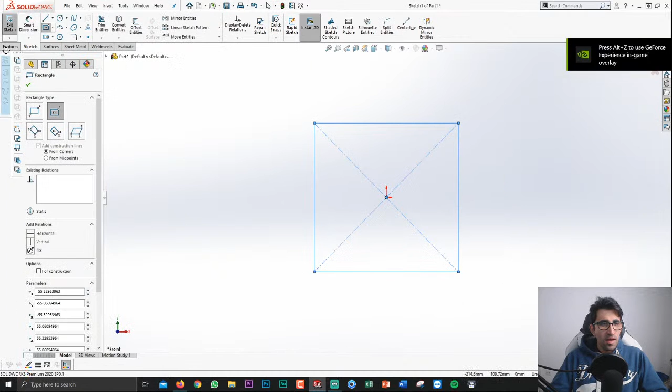Let me show you my screen so you can also see me better. So I remember very vividly one of the things I was really proud to be making the first day I started working with SolidWorks was something like a cube, and then something precisely like this. I didn't know how to create a cube in computers before, so everything I did was quite nice for me, and I was again hooked. It just became my hobby. One thing led to another. I kept working. It became my strongest asset. It got me hired with a very high paying job. It landed customers for me that I didn't know.

When I was in university, other students came to me and they even paid me to do their project, which was not legal, but now I can disclose it because that time is past. Even one of the students came to me. He said he had a client outside of the university and he's willing to pay £1,000. I studied in England, and British pounds was the currency. And for me, who was living on canned beans, every night eating Heinz beans or stuff like that, if I was lucky I could afford a pizza, £1,000 was out of this world.

But it's funny. A lot happened, and I'm really thankful to SolidWorks. The fact that I got my European German citizenship, everything. If you just trace back everything that happened in my story, one way or another, I kind of owe it to SolidWorks.

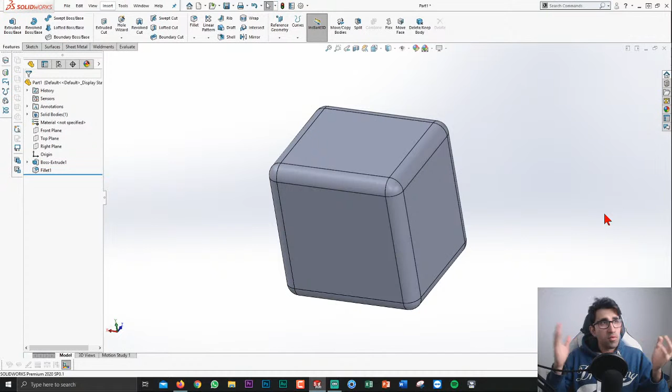Okay, good. Guys, the reason we are here today, I'm not going to teach any specific thing because my teachings are on the channel or on the webinar. Today we are only here to answer any question you have. Especially the repetitive ones, if you come across an issue, if you come across an error that frustrates you and you don't even know how to describe it or who to ask, this is why we are here today. And I hope people who are joining us now can hear me loud and clear. Just describe any situation. I'm going to go over each and every one of these questions and answer them to the fullest. So let me know what you think.

Avito, do you have any questions? I just mind my own business here and wait for you guys to...

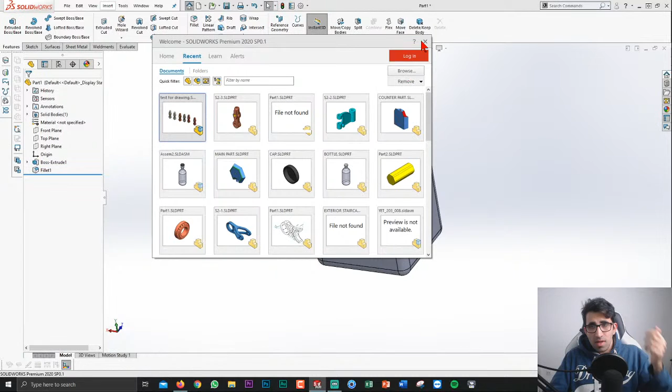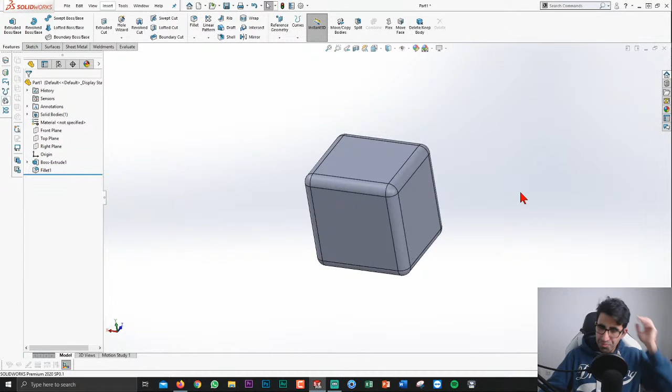Tanvir is asking me if I'm an expert on SolidWorks. Well, I have to clarify that because expert is a term that has a meaning when it comes to SolidWorks. There are levels in SolidWorks and expert is one of the levels. So let me tell you exactly how it is. As a matter of fact, I believe I have a picture of it somewhere, but I have to look for it. So just give me a second while I describe what exactly an expert is.

When it comes to SolidWorks, when you start, you're a beginner. Okay, the majority of people are beginners, newbies. They don't know how SolidWorks is and how it works. The next levels are intermediates who kind of know the software, they know the interface, and so on. And after that, we go to CSWA. CSWA stands for Certified SolidWorks Associate. Okay, this is the lowest certified rank SolidWorks offers.

After that, you go to Professional, CSWP, which is where I am, Certified SolidWorks Professional. I was in this level back in 2011 and recently I got it again. It doesn't mean you're not above this, but this is my minimum, CSWP. Once you get your certification in CSWP and 3 more certificates out of the 5 available, you are qualified to take on the CSWE exam, which stands for Certified SolidWorks Expert.

So if you're referring to that expert, I don't know. I haven't taken the time and effort to take on the exam. I might pass it, I might fail it, but I have never done that because it was never required for me. It was never necessary. CSWP did me just fine, and I basically achieved whatever I wanted to achieve, get the job, and do basically no challenges. So I never went after CSWE. I don't know if this is what you're asking. If you're asking expert in the everyday use of the word, you could call me a SolidWorks expert. Yes.

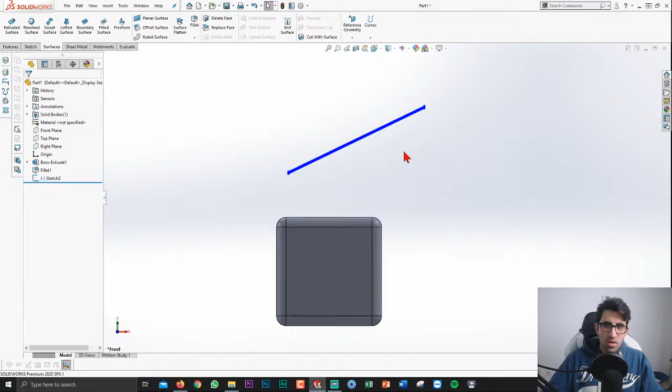I was talking about the line format, which is here. You can right click, go to toolbar, activate line format here. It was activated, I just deactivated it for you. And when you do that, it will be added somewhere. In my case, it's down here. And when you select your line, you can change its type. Go back to normal line. You can change its thickness. You can change its color, whatever you want. It doesn't change the nature of your line. It just changes the format.

Now, since I haven't gotten any technical question except for the surfacing techniques, I am going to scratch the surface on the surfacing technique. Do you see what I did there? So surfacing technique is very, very similar to features. If you compare the tools that you see here, they're pretty much the same, except the results you get from the tools in the surfaces tab come with zero thickness. So you have extruded surface, you have extruded boss, you have revolved, swept, lofted, boundary. So you have the equivalent of almost everything you get on the features tab. And in a second, I'm gonna go in and use some of them.

Although, due to the nature of surfaces, which come with zero thickness, some of the tools you get on the surface tab cannot and do not come in the features tab. You do not have any extrude cut. If you want to cut a surface, you're gonna have to trim it. Let me show you. First of all, I'm gonna start with a line because I cannot think of anything else right now. And once I do that, I can easily extrude this.

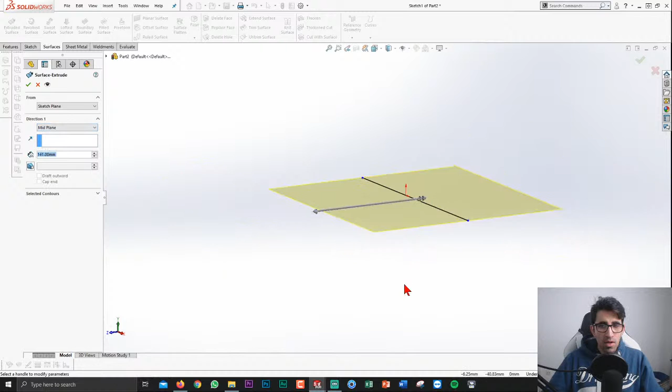There is no need for a thin extrusion because surfaces don't have thicknesses. Therefore, everything is thin anyway, and by thin, I mean zero thickness. So you can see the extrusion Direction 1 looks pretty much like the submenu on the extrusion in the features tab. And you can make a surface.

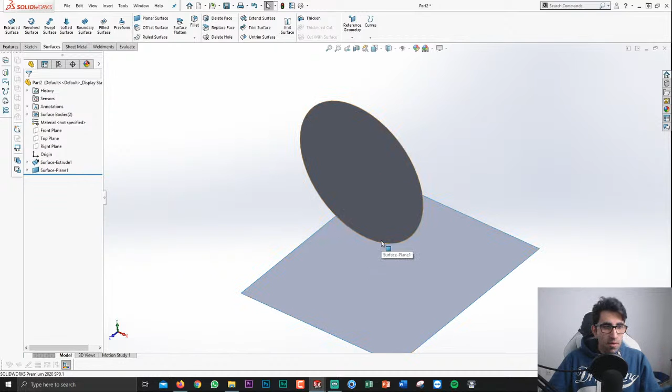Another way to make a surface is to use a planar surface. So if I draw a circle here and want to turn it into a surface, I would just use planar surface and this will become a surface, something like this. All right. Now, there are ways to convert a solid body, which is what you make when you're using the tools in the features tab, to a surface, and the other way around.

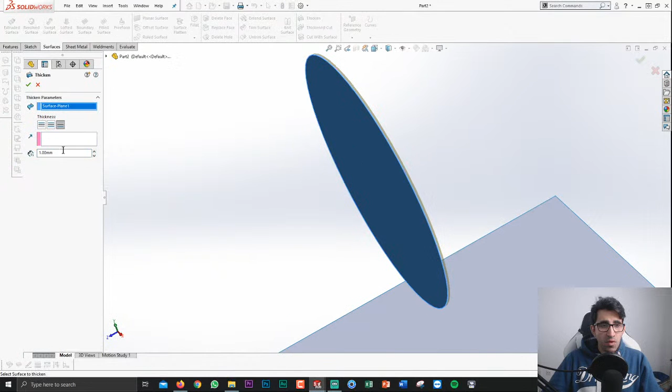There are tools on the first surface tab that allow you to convert your surface with zero thickness into a solid body with thickness, and that is called thicken, which is pretty intuitive. When you select the surface, you can define a thickness that you want to add. Let's just say 10, the direction on which side, or both.

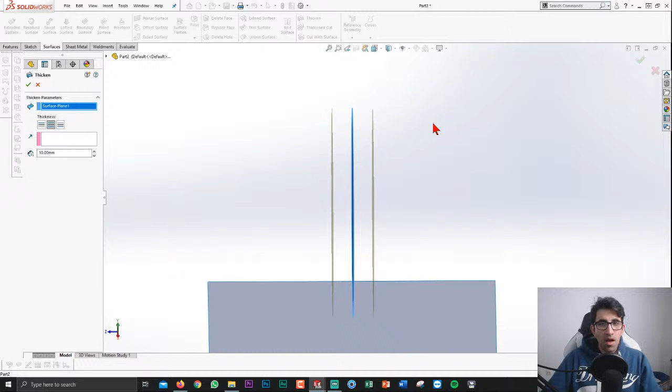But in case of both, it's a little bit different than the direction 1 in extrusion, because when I click on the middle button, it is thickening my surface 10 to the right and 10 to the left. So altogether, thickening it twice this value, 20. All right, don't forget this and don't make this mistake.

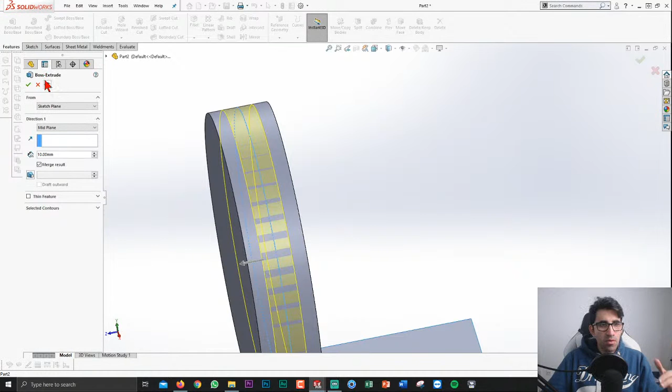Unlike this, if I go back and reuse this sketch and go to features, make an extrusion, set it to mid plane. If I put 10, you get 5, 5. You see that? This is the actual 10. So there are minor differences between the menus in the feature tab and the surface tab, and you have to get acquainted to that over time when you work with it. You just pick it up very fast. It's not that complicated.

So Deracuda says, I'm not finished with the surface, guys, I'm just reading the questions in between because this topic goes on for hours. He says he struggles with understanding how to fix errors when trying to define a sketch. Any chance you can purposely cause a basic error and then a complicated error and show how to identify and fix issues.

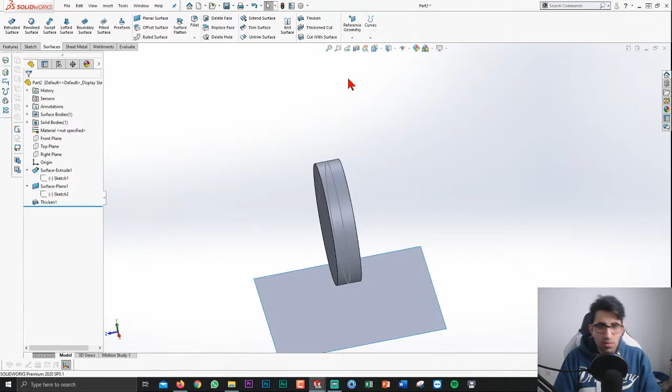Tanvir, I will get back to the surfaces, but this is a very good question and it's a short one, so I'm gonna do this and go back to surfaces. I hope that you're okay. Give me a thumbs up. Good. Deracuda, pay attention. This is a very, very common mistake.

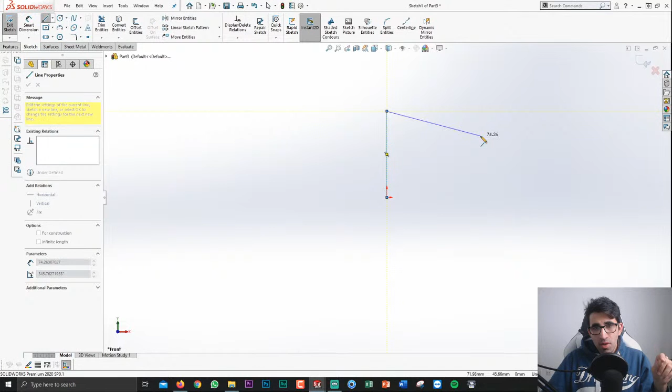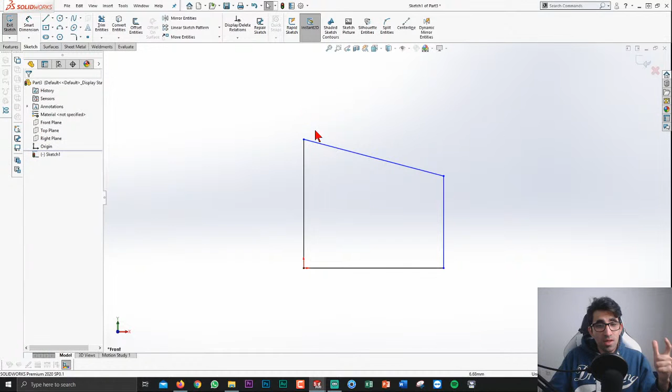So let me show you briefly what's happening so you understand what's going on. When you draw a sketch in SolidWorks, it can have one of 3 states. It can be an underdefined state, which is what you see here; look at my mouse cursor, it says my sketch is underdefined. It can be fully defined, where the sketch turns fully black. You see 2 of my entities are in black, 2 of them are in blue. So these 2 are underdefined, these 2 are fully defined. These are also not fully defined.

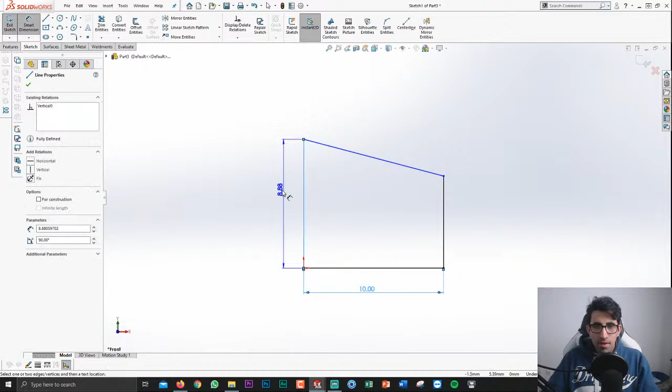And there is the last stage, overdefined. This is where you struggle, Deracuda. Let's make something that doesn't make any sense. So this value is 10. This value is also 10. And let's assign an angle here. I'm trying to purposely cause a mistake. Let's say 70 degrees. Right, everything is fully defined and you can see it here in black.

Now, what doesn't make sense? I assume most of you are engineers. Can we have this sketch over here and at the same time have this entity and this entity equal to each other? No. Why? Because in that case, we should be looking at a square. Therefore, this 70 degrees cannot exist. So if I click on equal, I just created a problem. No solution found, and this is exactly the state of an overdefined sketch.

So how do you solve it? When you're going to solve this, you have to click on the red entities, and immediately you see the existing relations assigned either automatically or manually to that entity. So I can see this line is vertical. It has an angle assigned to it, which is the 70, and equal length. These are yellow or mustardish, and this one is red. This means the red one is the issue and the two mustard ones are caused by it.

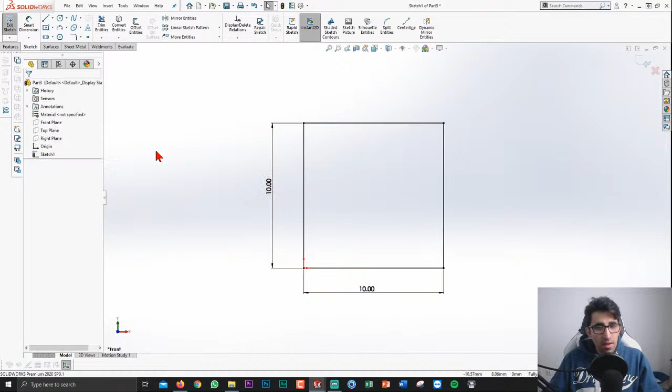Now you might be able to solve the problem by deleting one of the mustard ones. Now you see that it's still fully defined, but you don't have that 70 anymore. It's back to being a square, as I said. Control-Z that, click on that, delete equal length, and everything is back to normal. And it's not changing to a square because I just deleted the red one.

I hope it was clear for you there, Deracuda. Let me know.

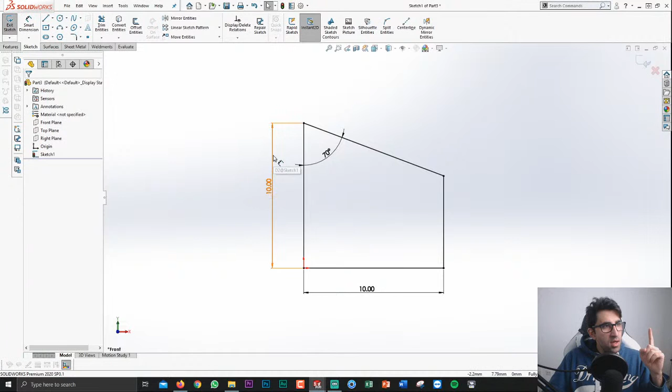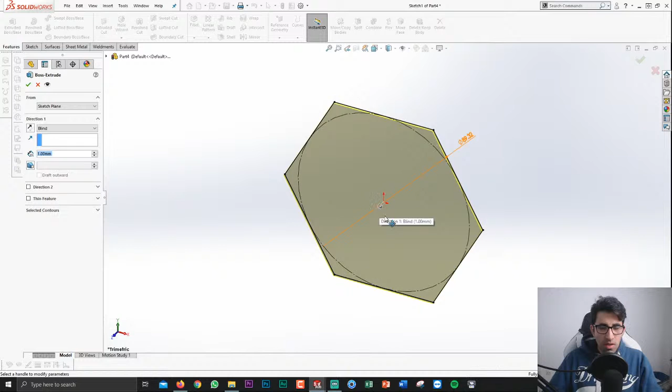Now, there is another issue, guys. Pay attention. It's in continuation of making errors in your sketch. A lot of times it happens when you are modeling. You draw a base sketch. I don't have time to fully define it, so I'll just do it automatically. And then you extrude it. I just need to have some edges and some points, right?

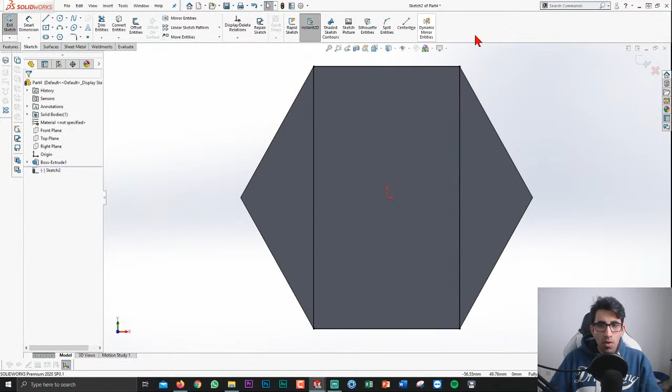And I'm gonna draw something here on top of this surface. Let's just say a rectangle. I'm gonna start from this point, okay? Emphasize on this point. And I'm gonna end on this one, right? Now we have a fully defined square. Now I'm gonna go ahead and extrude it a little bit further. Let's just say this is the component that I wanted to create.

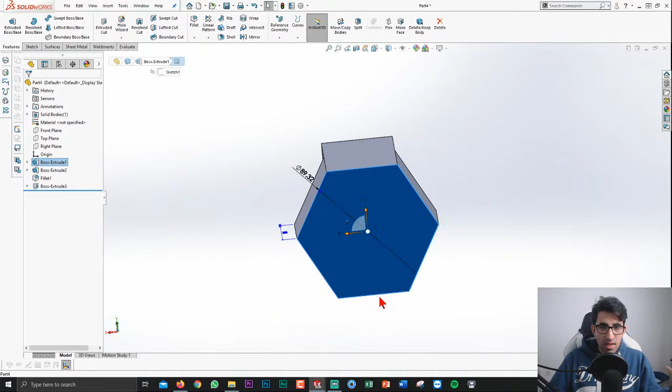Now I continue this, I add features on top. I don't know, fillet here. Let's just say, can we just create another hole there? That's also fine. Where is it? Go in, make a hole. All right. Now at this point I realize, oh, that initial cross section shouldn't have been a hexagon. It should have been a circle or pentagon, doesn't matter.

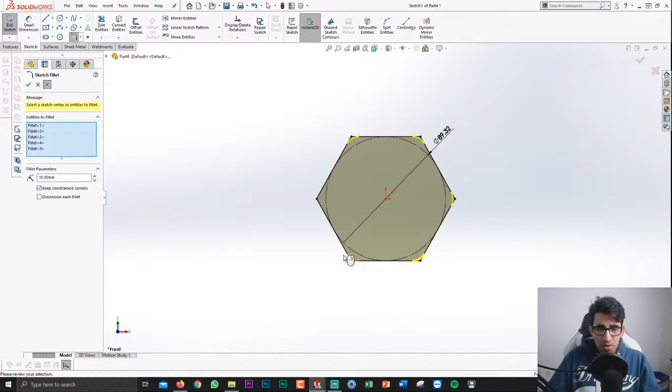So I go back, and without paying attention to all these dependent features that I built on top of my parent feature, which is the hexagon, I delete this, or you know what, better, I'm not gonna delete it. I'm just gonna round the edges. I just realized I forgot to round the edges. So casually, I round all the edges. I hope this works. All right, exactly worked.

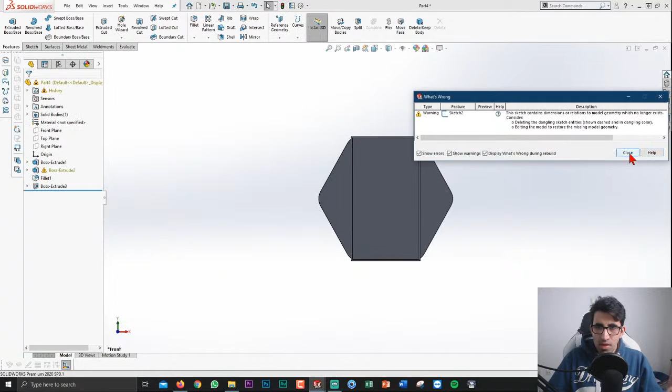Now, what happened? I get an error and everything is suppressed in the design tree and I just don't know what happened. When this menu pops up, don't worry. Either click on don't show again and click on continue, ignore error, because only then we can see what's going on. All right. Immediately I see where the error is, because this one is yellow. Now, I don't know if it's on the feature level or on the base sketch level.

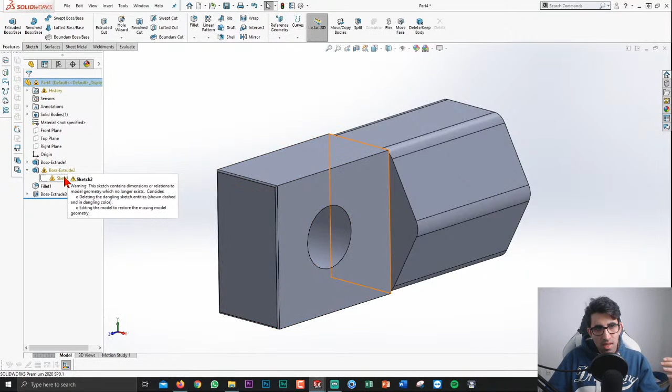So I open the Boss-Extrude, I see the sketch is in yellow. So I know I should go down and investigate the sketch. Feature is not the cause, it's caused by the sketch. So one click on that, click edit sketch, make it normal to your screen, and look for any mustardy entities. And you know entities are points, edges, and so on. So immediately I see this one in mustard and this one.

Why? Because this point was supposed to be coincident to that edge of the hexagon, which does not exist anymore. So it is trying to connect itself to an edge or to a point that doesn't exist anymore, and therefore you get the error message. Now, your ways are, you can delete the sketch relation first of all. It does get rid of the issue if I rebuild it, but it will leave your drawing in the underdefined state. So if you want to fix it and don't mess anything up, try other ways to fully define your sketch. In this case, I'm going to go with dimensions.

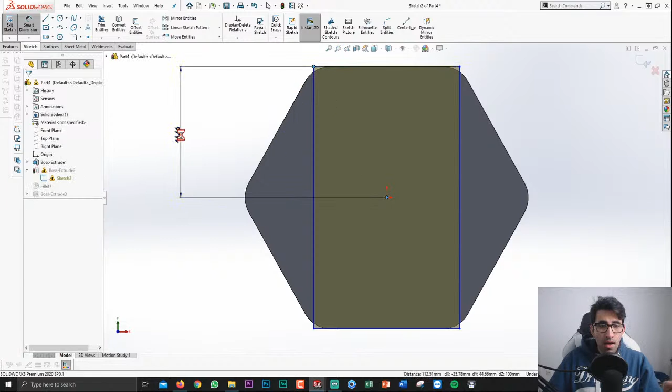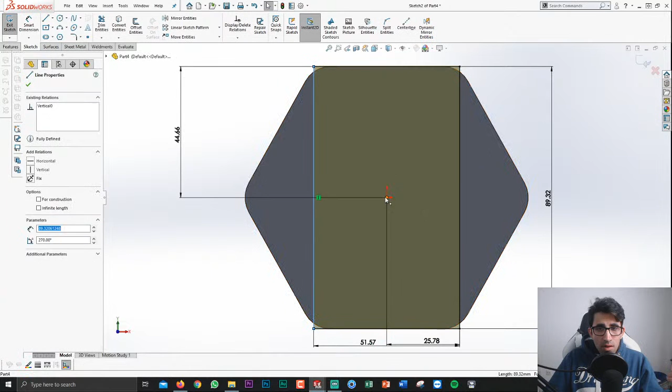I'm not going to change any dimension, but let's just say assign some dimensions to it. And until it's fully defined, there is the height missing, and boom. Now it's fully defined and I can rebuild it and the error message should be gone. It's still not gone. Interesting. So let me go back. Anything else? This one? No, that doesn't make any sense.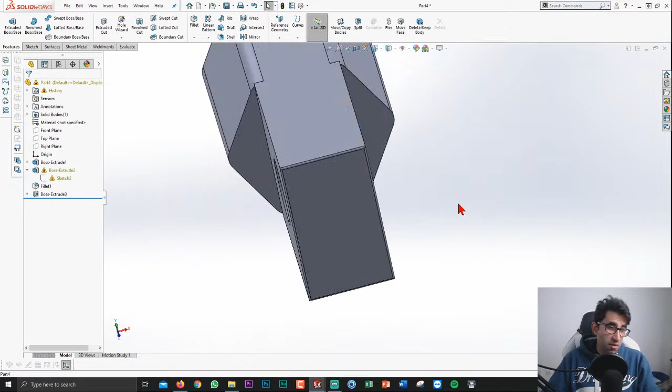So in this case, what would I do? Because this is the first time it's happening to me. It's not the first time. In this example, it's the first time. So I'm not prepared. Let's see what I do, because this is my real reaction. If I face a situation like this, I try to, let's just do something else. I'll draw another one.

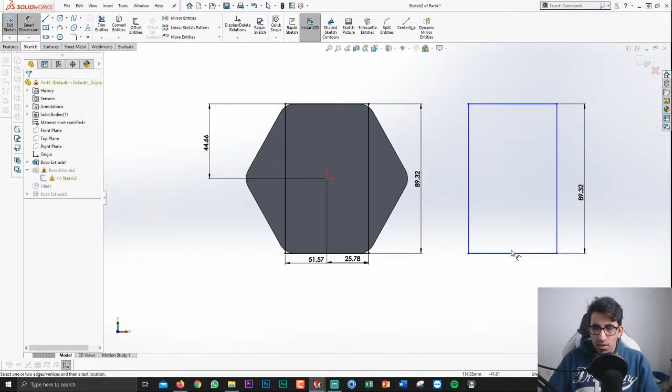This one should be this much, right? And this is how much? 51, 57. 51, 57. Get rid of this completely. That's what I'm gonna do. Place this one midpoint on the center. This should do the trick. Coincident and rebuild.

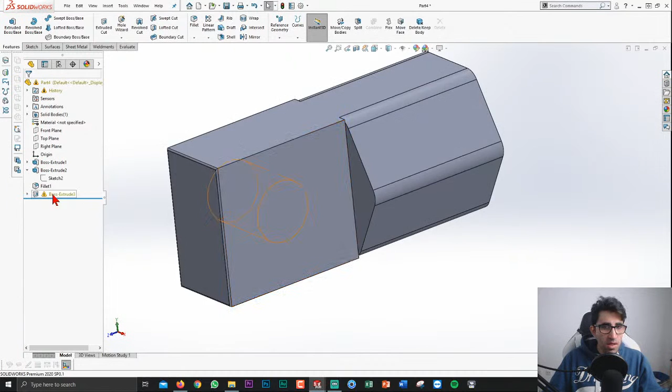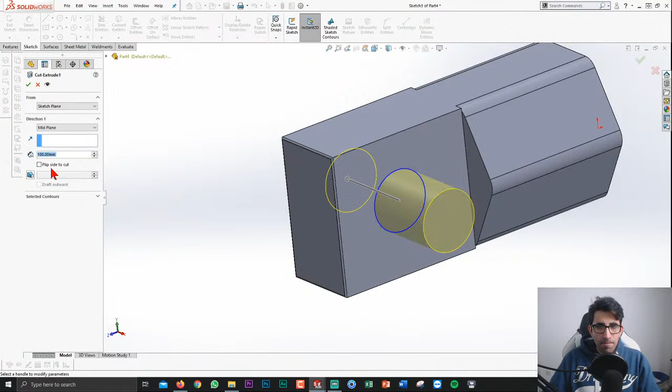There is still another error. Oh, good. At least now I push the error to the next level, and this time this one is missing. We didn't fully define it. So let's get off this 1, 2. Use this. Extrude cut. Done. I see where it's going. Through all both. Done. Still. That's something, man. All right.

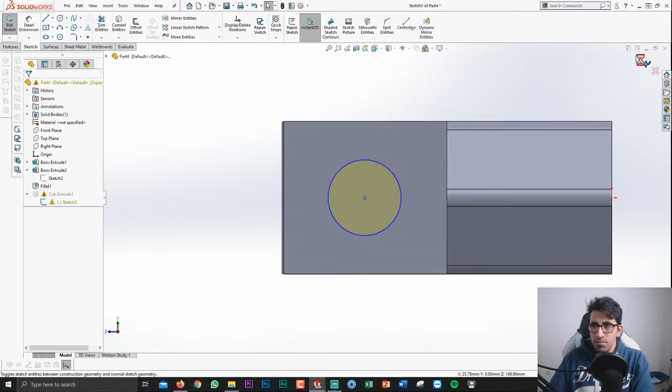Whoa, that goes into the pro level. I think I know what's going on. Yep. All right. So guys, before I show you how to fix this, let's just do a recap quickly, because it has taken longer than usual. Sometimes it happens for me too.

What did I do? I started drawing a hexagon and I built a cube on top of that, and I placed the corners of the cube on the corners of the hexagon. I went back, rounded the edges of the hexagon so the points were eliminated, and that cube was floating in the air. So that caused my first error. How did I solve it?

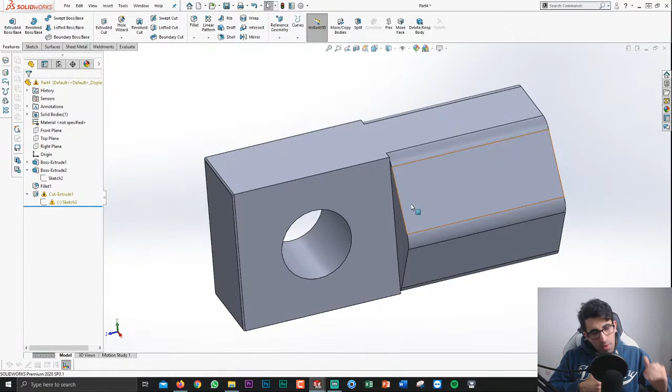I removed the existing relation to it, and for some reason it was still causing the problem for the same sketch. I didn't understand why, so immediately I just replaced it with a new rectangle, and the problem was solved. Now the problem was solved on that level, and I pushed the problem down the design tree to the last feature, which is this one, and it became yellow. And as I told you, when you see a yellow one, you open it.

If the sketch is the issue, then you're not looking at the feature level, which is the top layer, you're looking at the lower layer. I started investigating the lower level, which is the sketch, and still the problem was not solved. I even replaced it, still not solved. So I have to dig a little bit deeper, which I completely ignored reading the messages, because I don't do that anymore. Well, sometimes you should. And it turned out the sketch, which is the second layer, is not the issue.

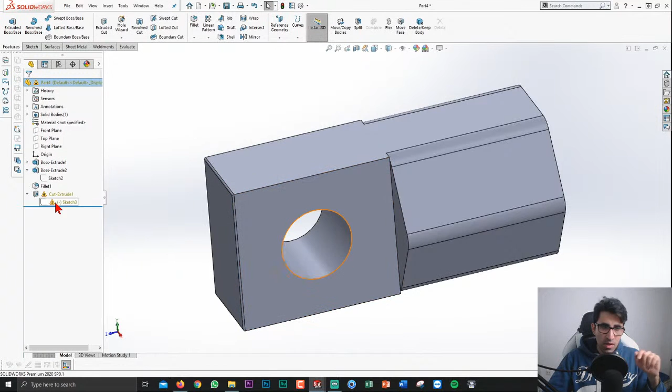The plane, or the surface that I used to draw the sketch on, was missing, because I replaced that rectangle with a new one. So the surface has a new name. It doesn't recognize it. How to fix it? Right click on the sketch, click on edit sketch plane. You see the mustardy error here, missing face. Delete it, select the new one, click OK, and done. All the errors are solved. So you're gonna have to push the errors all the way down until they're solved.

All right, that was in regard to Dracuda's question. Marcus has a question. He says, when you knit a surface, so we're back to surfaces again, there is an option that says merge entities. What is that option for? Okay, that's a very interesting one, and that's a general one. Hold it on pause until I read all the questions, because some of the questions are relevant and I can answer them at once. Dracuda. All right, done, no problem.

Adarsh is asking about CSWA. MS, is it possible to make a loft with 90 degrees between each sketch? Yes, it's possible. Aryan has the same name as me. Hi, would you please suggest some ways to practice to learn SolidWorks in a very efficient way? Yes, I can. Just stick around. I have prepared something special for that, as a matter of fact. So Rahmat, also tutorial molding.

Okay, will do. Back to Marcus's question, which he was asking about knit, and knit is over here, guys, knit surface, and he's asking merge entities. What does this thing do? When you merge two surfaces or more together, you could either create, let's just do that. It's easier than explaining it. So let's just create one here. I'll make a surface and another one next to it, like this. Planar surface, done, knit. Now, if I want to knit these two and merge entities, look what happens.

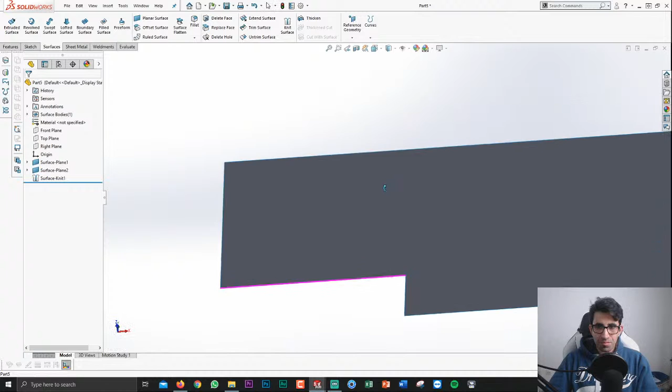This line is completely out. This is what an entity is. If I go back and uncheck it, you see that line is there. So you did knit them together, they are connected, but I left this line entity, which is the common edge or border they have together, there. Why? It could be for multiple purposes, because maybe I want to treat this plane separately. Maybe I want to bend it while this one stays flat, so I leave it on.

If we want to handle them together, you just merge the entities and you get rid of the border and everything is fine. I hope that was very down to detail, Marcus. Let me know if you have more questions about that. Adarsh is okay. CSWA.

Guys, if you give me a second, I might be able to find something interesting to show you, because I have a graph which is very interesting about CSWA, where CSWA is. Yeah, found it. So this is where CSWA is. According to a study done in 2018-2019, only about 7% of all SolidWorks users are CSWA certified.

Again, as I said in the beginning of this webinar, CSWA stands for Certified SolidWorks Associate, the lowest certification SolidWorks offers. So in order to pass this and get certified, you need to take an online exam which costs around $100. You need to have SolidWorks installed on your computer, and the exam is 3 hours long and has different sections.

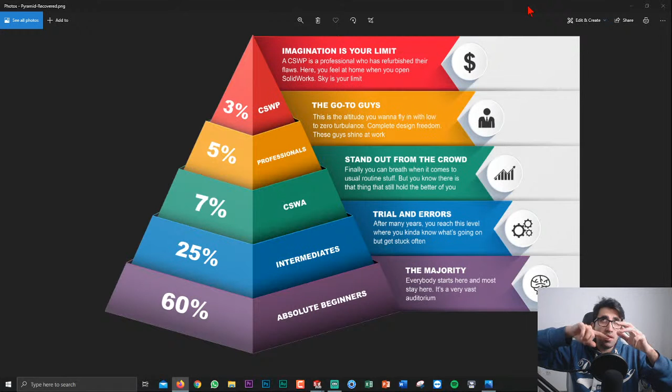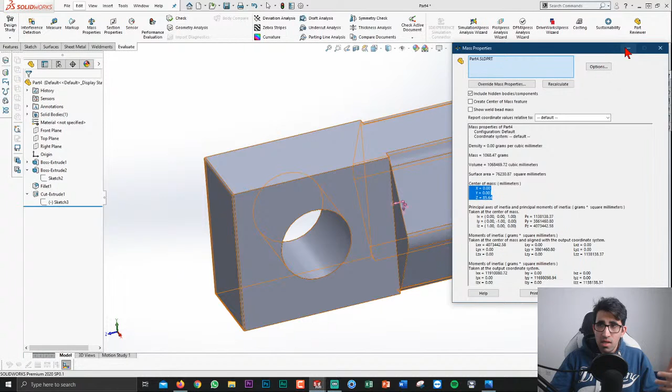Usually they ask you to bring the assembly into a certain position at an angle or a distance and measure, not the mass, the center of gravity or something. Let me just check that. Which one did I forget the name of? So we don't have a mass here. In this one we do. Yeah, they ask you to measure the center of mass, X, Y, and Z, and you get four options to answer your question.

Now, the challenging thing about CSWA is when you get question 1, you have to create a part, and you need to spend most of your time on that part. Why? Because for the two following questions, 2 and 3, you don't create something from scratch. You just take whatever you created, modify it 2 more times and answer. So if you built your model wrong the first time, you're going to answer the next couple of questions that depend on that model absolutely wrong.

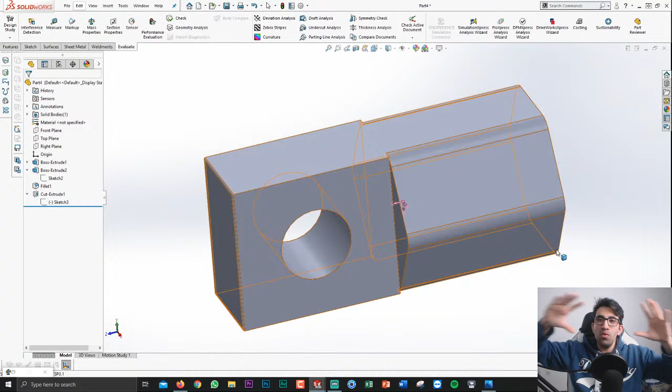So don't worry that your 3 hours is not divided equally throughout the questions, because for each group of questions, you need to spend 70% or 90% of your time on the main first question and 30% on just adjusting it, okay?

Now that's CSWA, and it increases your chance of getting a job really highly, because that's the easiest and fastest way to show an employer how much you know SolidWorks. Otherwise, you're just going to have to say, hey, I'm really good at it, trust me. So certificates do the job for you. They even issue a barcode you can put on your CV, and whenever they scan it, they go to an official SolidWorks directory where your name appears as an associate or professional certified. All right, not too much detail because we're getting more questions.

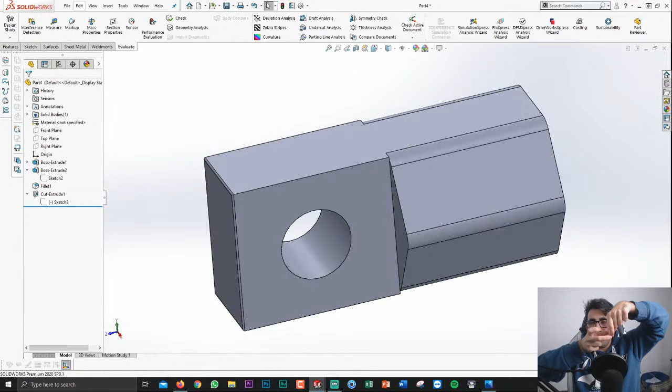MS, is it possible to make a 90 degrees? Yes, it's very much possible. However, make sure they don't have an entity in common. So if there is a rectangle here and a rectangle here, sometimes you cannot do the loft because they share that entity. Leave a little bit of gap between them, then that's possible.

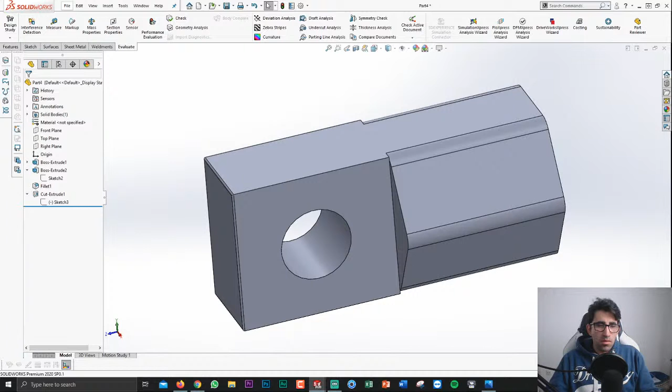Mustaf is asking, I have circular sketch pattern problems. Okay, what is the problem? Can you be more specific? Mason says, can you make a 2D shape and sweep it around the x-axis? Yeah, you can. You mean revolve it around the x-axis? You don't sweep around something. You sweep it along a path or along an axis. Did you say along or around? Around. You're talking about revolve. Mason Savaria, please write your question again. Are you talking about sweeping or revolving?

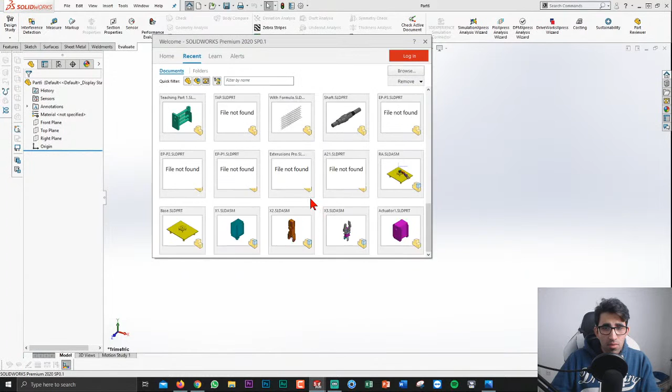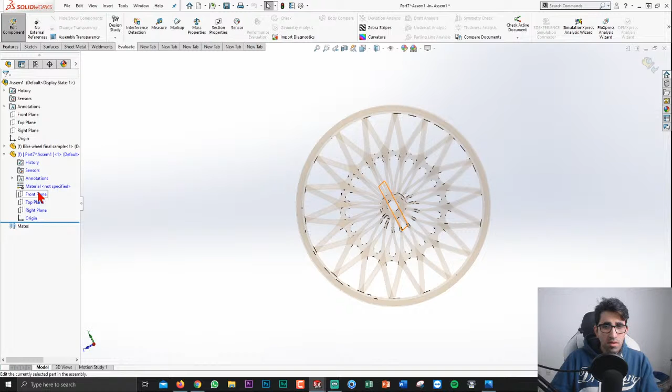Garrett says, how do you use gear mates? Garrett, it's really easy, but I wish I had some gears ready. Let me see if I have worked with any gears in the last couple of weeks. Now I'm gonna just take this bike wheel and assume it's a gear. Go to the assembly. We're gonna have to put it there. Now I need a shaft, just to make it stable. New part, done. Edit. Give me a plane. This one is fine.

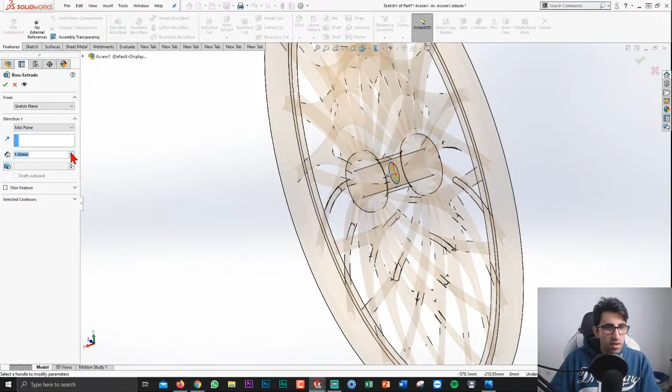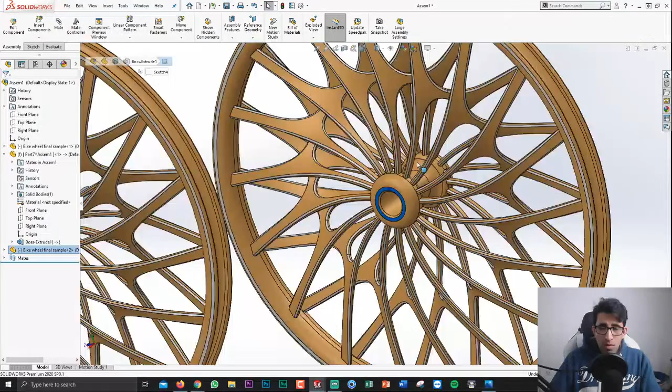I cannot select that. Thank you. Done. All right, so this is fixed, right? This one should be floating. Nice and easy. Now let's just make this on top of this. Done. Now I need two of them. Assume these are gears, okay? This one and this one, same level. This is very, very messy. This should not be the way you should be working, but in this case, it doesn't matter. And this one, same level, which doesn't make any sense. Let's put it back and fix this.

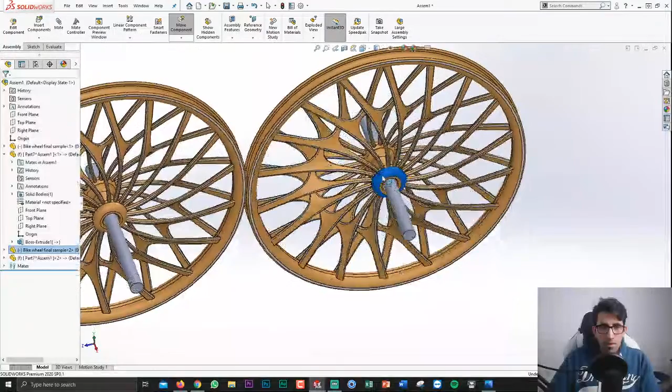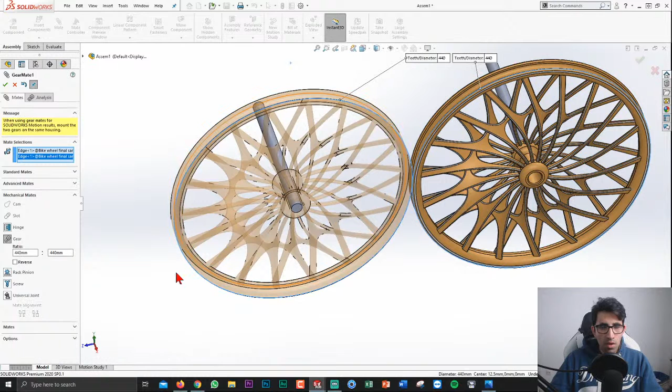Now, one more mate we have to do in order to answer that. This one and this one, same level. Now, all right. Now I want to assume these two are gears. So you go to mate, you go to mechanical mates, you open gear, and you select the right pitch diameter of a gear. If you design your gear correctly, if you go to geargenerator.com, for example, they come with the right pitch diameter, and you can define it here. The ratio, since these are equal, is 1-to-1. You can select reverse if you want to rotate in reverse. And when you rotate one, the other one rotates like a gear. So that was for Garrett.

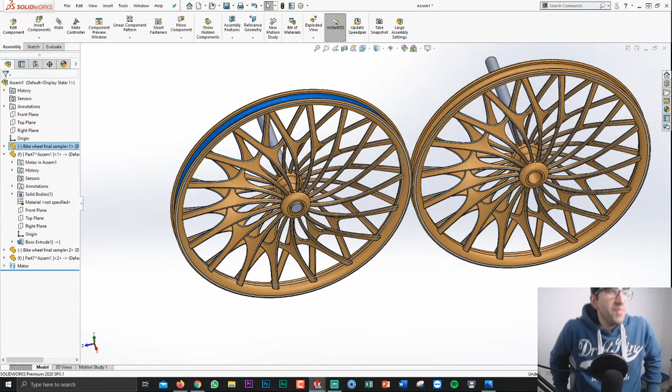Maria is asking, what is the difference between fold, bend, and flange for sheet metal? Oh, Maria Russo. I had a colleague called Maria Russo.

I cannot tell you that, because I'm not that good in sheet metal, but I can try and give you my best shot. So fold, bend, and flange. Maria, unfortunately, I'm gonna have to pass. This is not my area of expertise. You're talking about fold, flange was somewhere here.

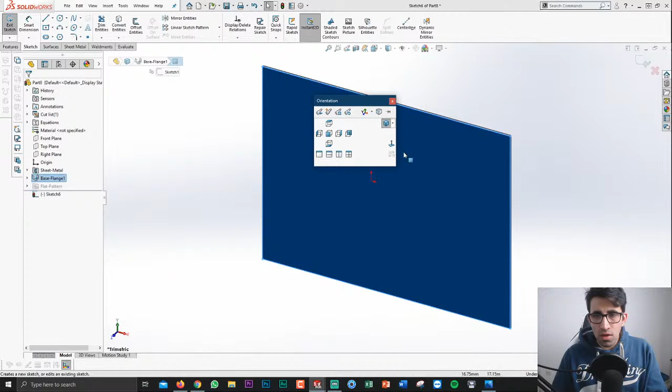Mustafa is asking, I cannot draw many patterns regarding the circular pattern he said before on the circle or rectangle. Well, let's just show you how it works. It's not that difficult when you're drawing on a surface. Let's just say I'm gonna make a circular pattern of this sketch. So I select it, go here, pick circular pattern. First of all, automatically it picked the right point I wanted to pick. If it didn't, you select the point where you wanna rotate your sketches around.

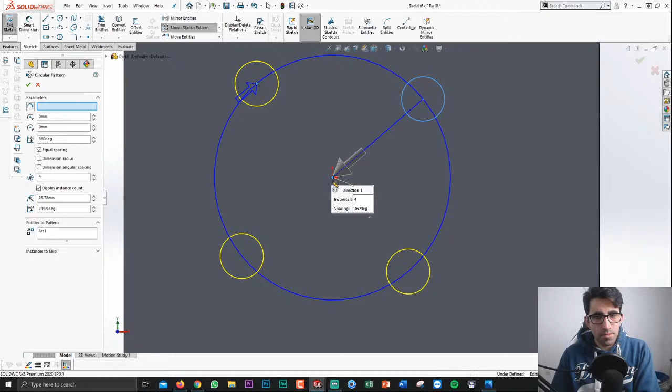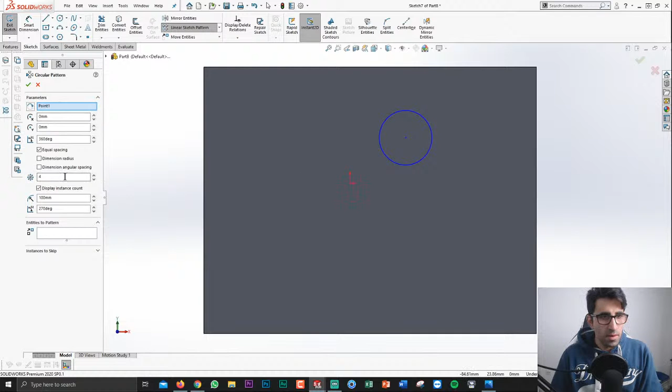So pick it, and you change the number of entities you want to create, and you do it. I mean, this is all it is. I deleted that point, that's why it didn't work. Let's just do it again quickly, otherwise I haven't proven my point. And let's pick this one. It picked. Now select the circle 4, 5, 6, 7, 8, 9, 10, 17 times and click OK. That's it. That's all you have to do for a circular sketch pattern.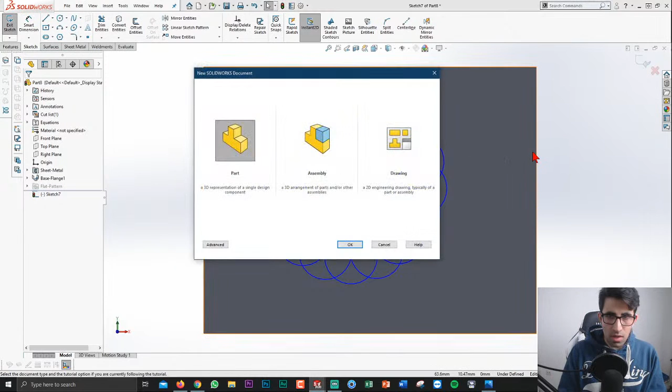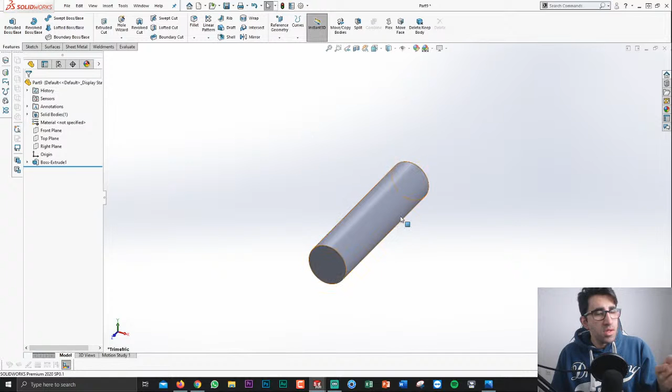Naresh, how can I make a concave shape on a rod surface? Concave shape on a rod surface. So is it on the end surfaces of the rod, or is it on the circular surface of the rod? So if you're talking about a rod, you have a rod, right? What kind of concave? You're welcome, Mustafa. Naresh, let me read the other questions. Let me know if you want me to show how to make a concave here or here. Because if it's here, then I'm gonna have to ask you how. What kind of concave? Because there are other ways to do it. If it's here, it's rather easy.

KM6HVU says, involute gear help. Involute, I'm gonna have to Google that word. I'm sorry. If I help you, you're welcome. If not, please let me know what involute means.

Lucifer asking, is there any website to get parts to practice assembly? My website. I have the perfect tutorial for assembly. So if I go back, let's just do this, guys. Go to youtube.com, okay? And type SolidWorks assembly, okay? You come across this video, the top one, that's mine with 64K.

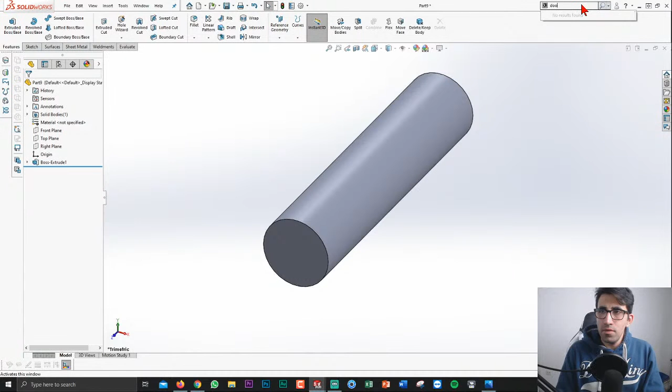Concave. What was that? You want to make a concave here. If you wanted to make it outwards, there is a perfect feature for that. It's called dome, not doom, dome, and you can use it like this and increase the value to make it like that. So this is outwards. Now if you want to go inwards, I'm not sure if there is any reverse one for it, but the way I would do it is like this.

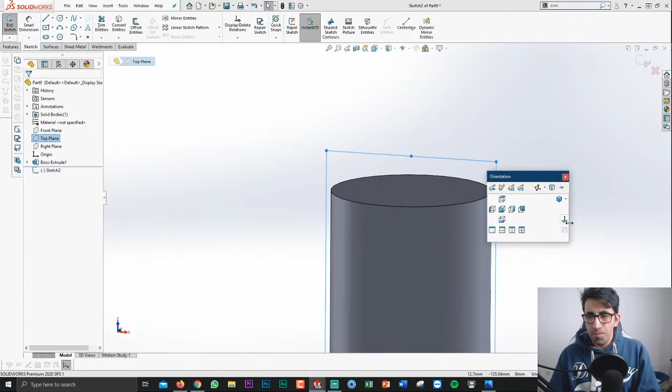So this is my end surface, I'm gonna have to work with, let's just say, a circle, depending on how much you want to do the concaving for. Let's just say like this, or I can even connect it to this point. Merge it too. Now this is what I would do.

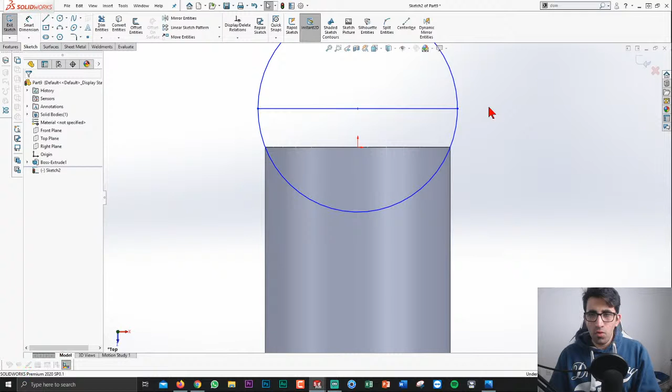So far I did nothing fancy. It's only a half circle where I'm gonna go and use the revolved cut for, and when I do that like this, I have just created a concave surface on the end of the rod. Is this what you meant?

Lucifer, you're welcome. Rahmat, file, AutoCAD to SolidWorks. So if you want to insert a file, you can just change it here. I believe AutoCAD is integrated, like here, look, you have AutoCAD file, DXF and DWG, 2Ds, okay?

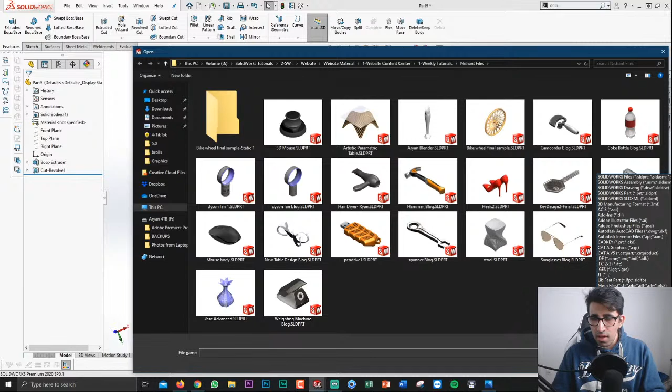And you have other programs like CATIA, you have programs like Autodesk Inventor, even Photoshop or Illustrator from Adobe products, and many more, maybe Rhino, Creo, Solid Edge. You can just go here, change the format to whatever you want, and insert those parts, Rahmat. That's very easy.

Naresh, you're welcome. And guys, I think it's exactly 59 minutes. Let me just quickly see if I missed any question.

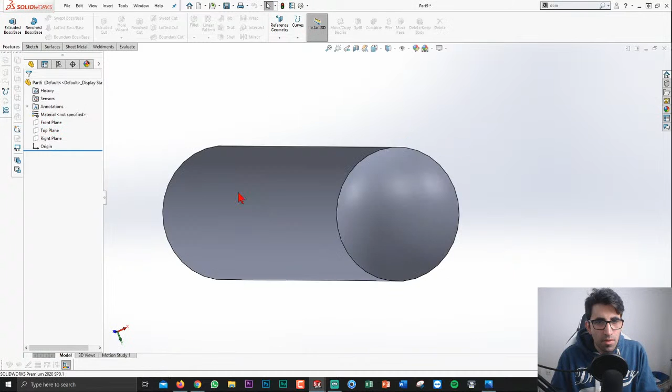And then it says I'm having a problem putting another layer, encapsulating a solid model. How can I assign it as a new solid body, add a different material? Since this is a very quick one, when you have a solid body and you want to put it inside another one without them being merged into one, you just do whatever you want, uncheck merge result, and then they will be treated as two separate bodies.

You can see it over here. You have two solid bodies here. If I make this one see-through, you can see the other one inside. You can right click here, assign a material to this one, and assign a different material to this one.

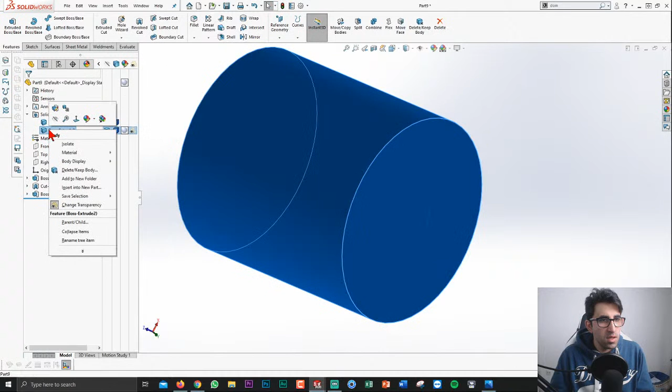That was for Anand. Tanmay, you're welcome. Lucifer, basic motion and animation. I don't know exactly what you mean, basic motion animation. I'm gonna have to get back to you on that. Rahmat, bill of materials tutorial. I also have to get back to you on this.